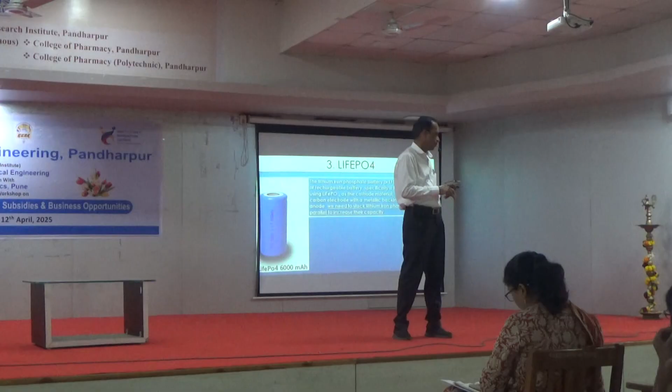Number 2, when you put batteries in series and parallel, you use a compartment in between—if you use a good quality one, there's no problem. And one more thing, you put temperature sensors on the body. When the temperature reaches above 60 degrees, it should cut off. The main problem is that in summer our ambient temperature itself runs around 45-50 degrees.

And if you notice, most of the accidents happen only in the summer season. Maybe this month, next month, and up to June, you will see a lot of fire incidents. Okay good, one more point I remembered.

I will tell you about the Ola scooter, which came right after COVID. When the Ola scooter was launched in the market, my son asked me, should I go for this? I said wait, because the Ola scooter is 100% manufactured in China, and that is not ideal for Indian road conditions—it has to work in the fields, on the highway, and on small roads too. Then he said, no, but I want to go for that.

I told him one thing: we have very good, well-known companies with very good experience in the suspension of mechanical infrastructure. I said either go for TVS or Hero Honda. You must have seen Ola scooters around, and the latest scooters too, like Bajaj—there's a lot of difference in the body of those vehicles.

I say, any new technology, if you launch it in a hurry, you burn your fingers. Because if you really look at the performance, the Ola cell from 5 years back compared with today's cell—you will see the difference. Okay, any questions?

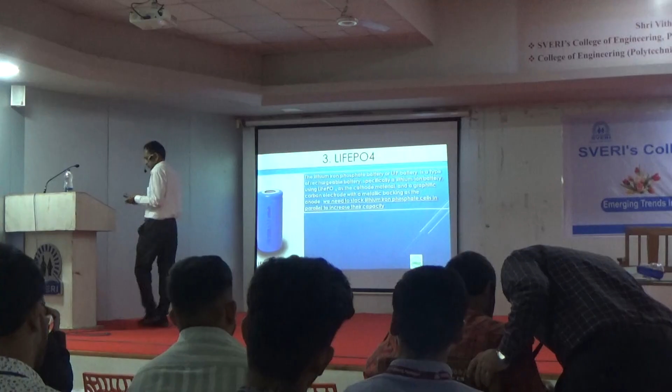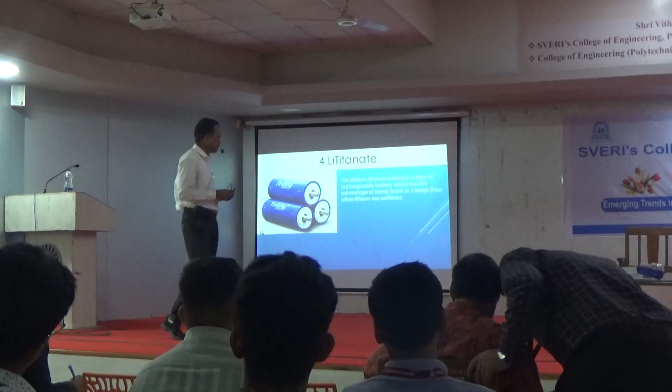Okay, this is one more battery which is interesting. Lithium iron phosphate battery, only you know, but there is one more battery called lithium titanate. Now this battery is 2.4 volts. Life is 50 years.

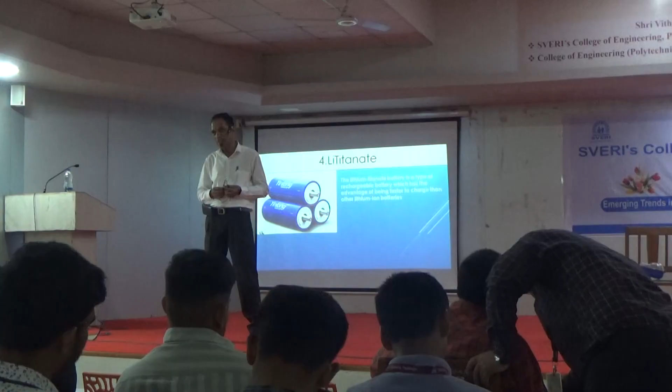One more thing, you understood about the ampere hour capacity of the battery, right? You talk about the load current. There is one thing called as a charging current. So most of the lead batteries they are charged at C by 10 or C by 5. But there are some batteries which can be charged in minutes. That is called lithium titanate.

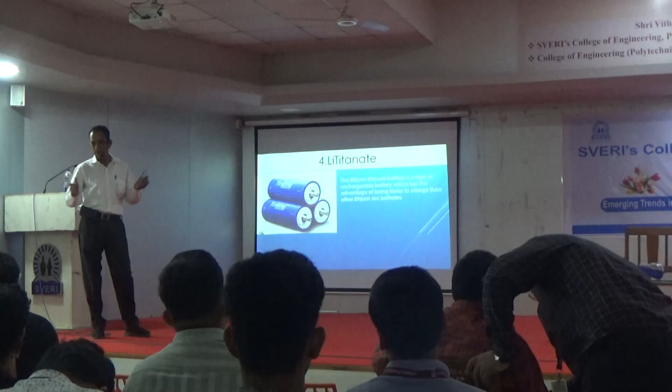Or there is one more concept called a supercapacitor. Suppose the bus travels for 15 minutes, that bus has 1 minute stop, so in 1 minute they will charge that particular battery. The reason is, if you have smaller batteries, you can accommodate more people.

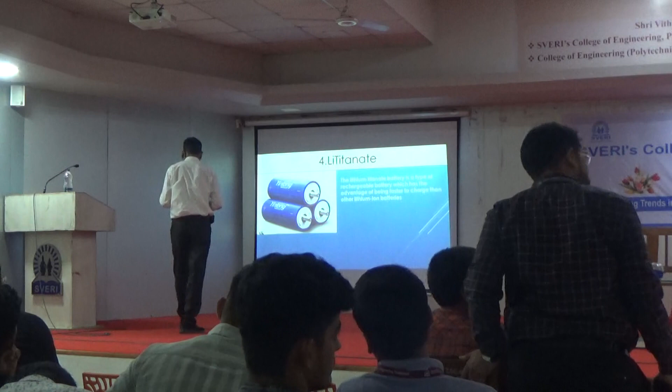So if the battery is bigger, the load is more. This is generally used in Germany. This supercapacitor is also used for tanks, defense tanks. In a fraction of a microsecond, that will deliver the output.

This is also used in the bus which I told you about. In 1 minute, the battery is fully charged, and the bus will run for 15 to 20 minutes.

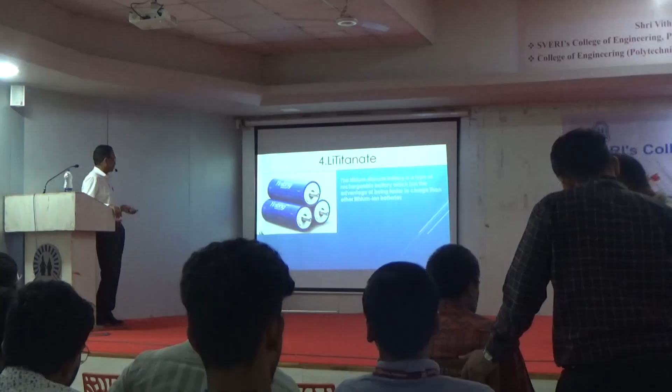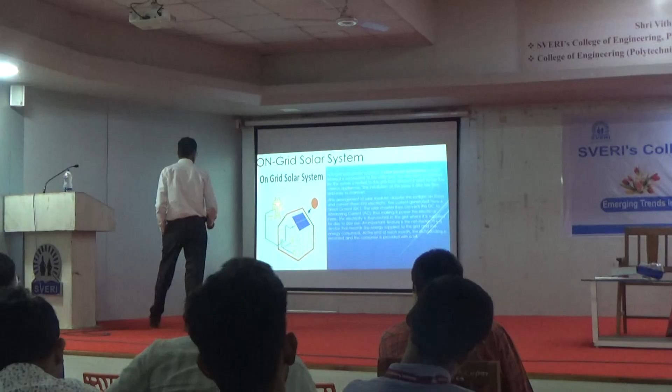But the only problem is here, like when there is no MSEB, total generation is wasted. Because MSEB input 50 Hz will trigger the solar inverter. When there is no MSEB, all electricity generated is wasted.

So this is on grid. For that, one more latest concept in the market is called a hybrid inverter. So when there is no MSEB, that will charge the battery, and the battery will give back the load to the load, like input to the load.

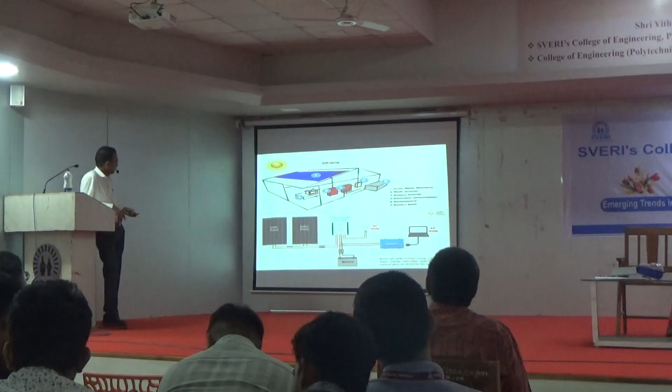Now this is a single screen showing the solar panel what we are studying. We start from the solar cell, you make a solar panel. You use a lithium iron phosphate battery for the off grid.

These are the different cells. And this is a DC microgrid system. Meaning you are using a solar panel, you are using a lithium ion battery or lithium iron phosphate, and you are using all the DC load line.

The bulb is DC, the fan is DC. Don't you see? The bulb is DC, the fan is DC.